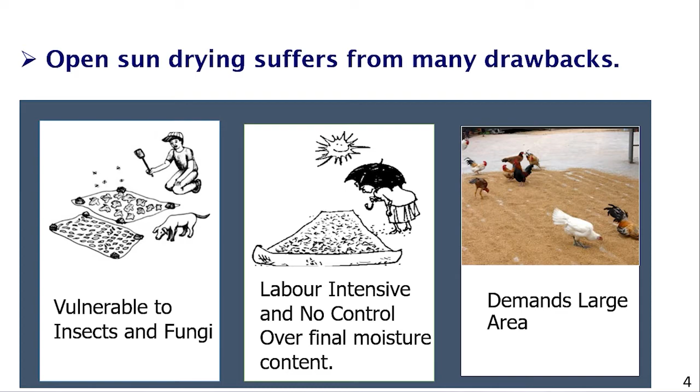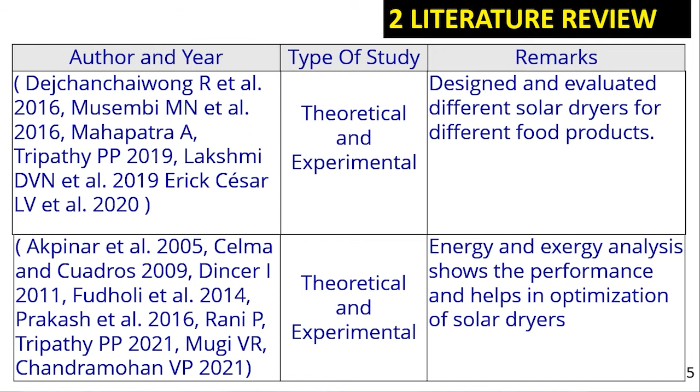There are many studies conducted in this solar drying area, and many authors designed and evaluated different solar dryers for drying different foods. There are also studies that show the economic benefit of using solar dryers. However, there are no studies conducted to evaluate the performance of solar dryers for drying injera specifically.

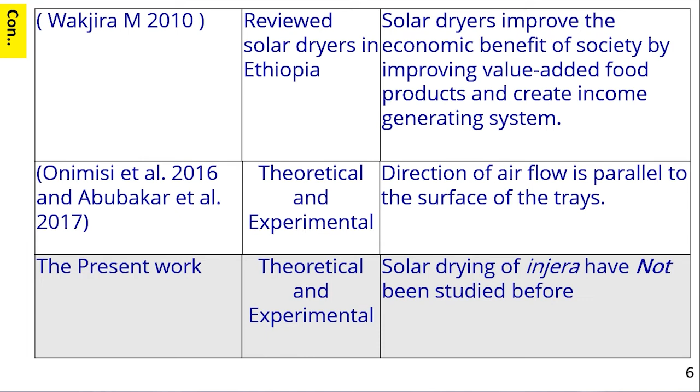Also, very limited studies were conducted to improve the non-homogeneity of drying air distribution in the drying chamber. So based on this research gap, the objective of this study will be presented next. The first objective is to experimentally investigate the performance of the modified mixed mode solar injera dryer. The next is to improve the non-homogeneity of drying air distribution through the drying trays. Finally, to perform economic analysis of this modified mixed mode dryer by comparing it with electric dryers.

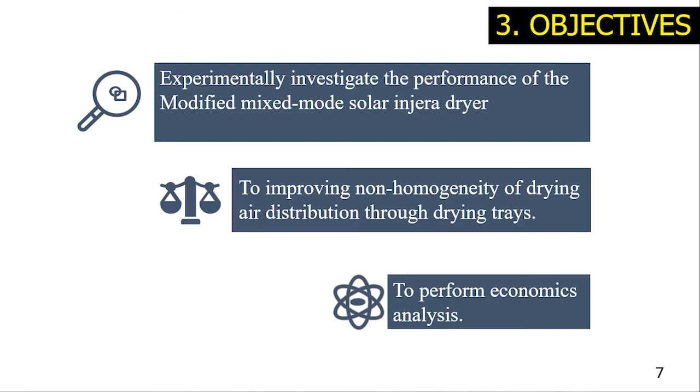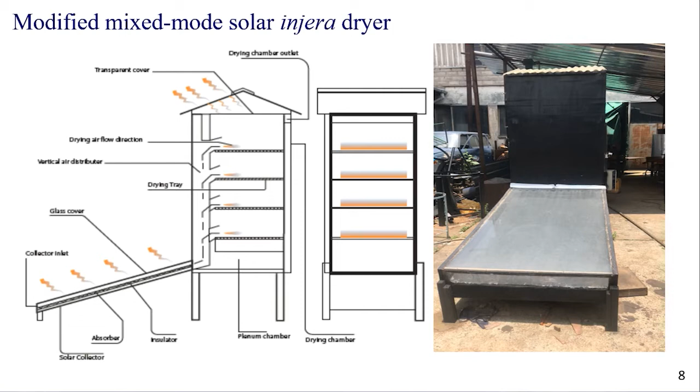This is the image of this modified mixed mode solar injera dryer. As you can see, the vertical distribution channel is integrated inside the drying chamber to facilitate uniform air distribution through different drying tray positions.

The methodology followed in this study is classified into two. First, different flow parameters were measured in 5-minute intervals. Simultaneously, the weight of injera was measured in 30-minute intervals, and based on this testing result, the performance of the modified mixed mode solar injera dryer is evaluated by using energy and exergy analysis, and then economic analysis was also conducted finally. In doing so, different assumptions were imposed.

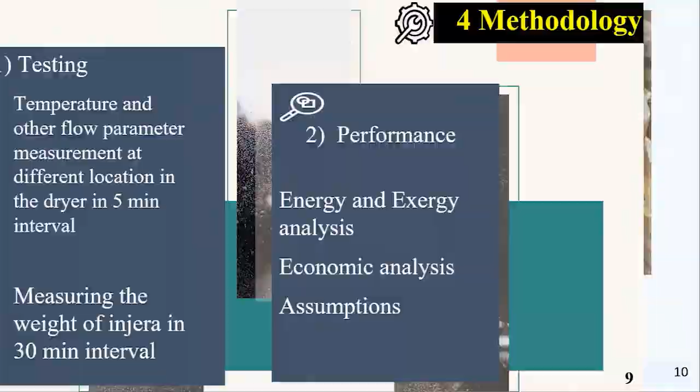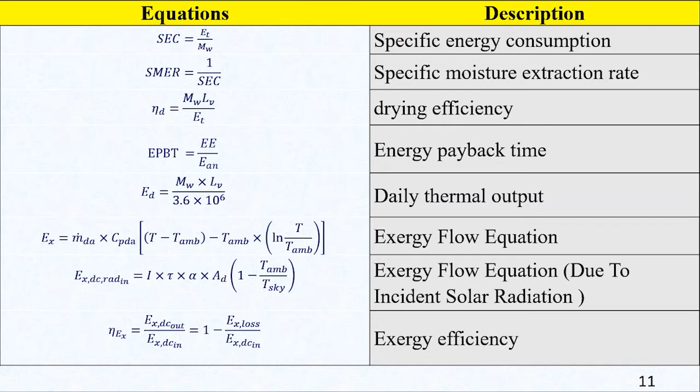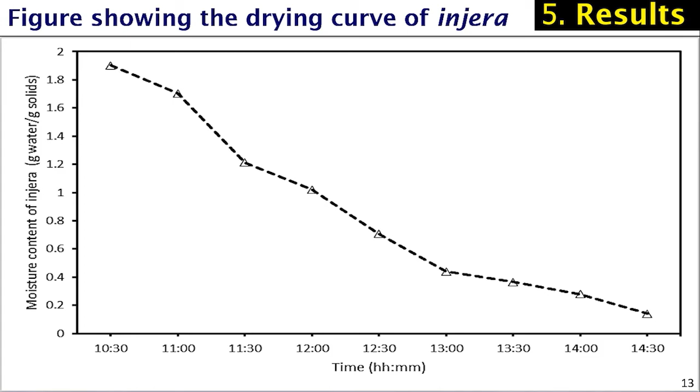And also, for the performance of the dryer, the specific energy consumption and the drying efficiency were evaluated to be 6.9 kilowatt-hours per kilogram and 10%, respectively. So this shows that specific energy consumption was somewhat higher, which shows that if the dryer were loaded to its full capacity, which is 10 kilograms of injera per batch, we can achieve a lower specific energy consumption, which also increases drying efficiency.

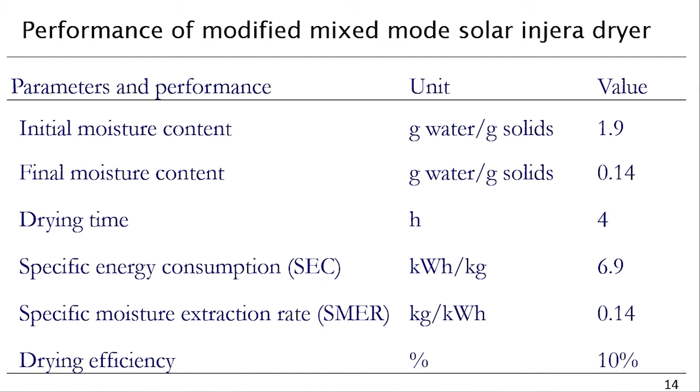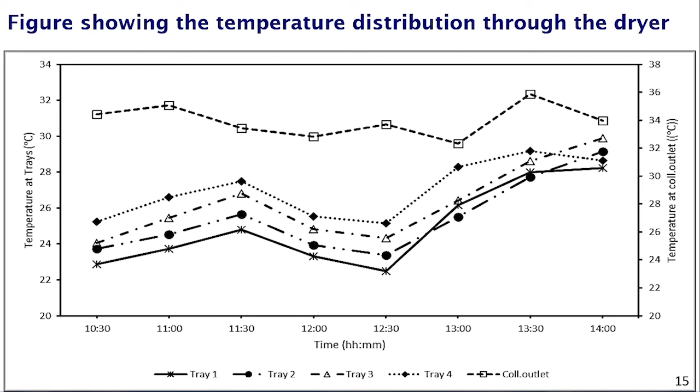Also you can see the temperature distribution through the drying trays. The bottom four lines show that, and the maximum difference between the modified mix drying trays was found to be 2 degrees Celsius, which indicates that almost uniform temperature distribution was achieved throughout the drying trays.

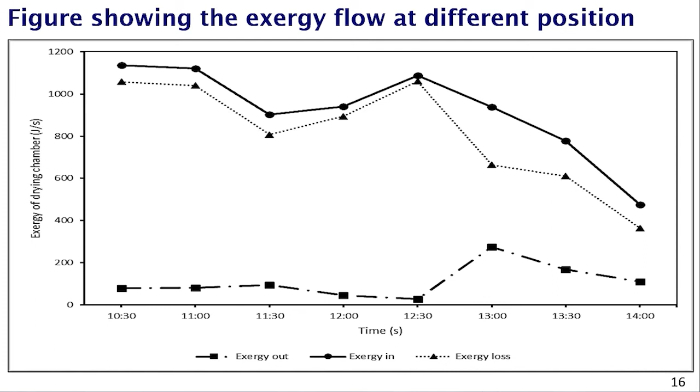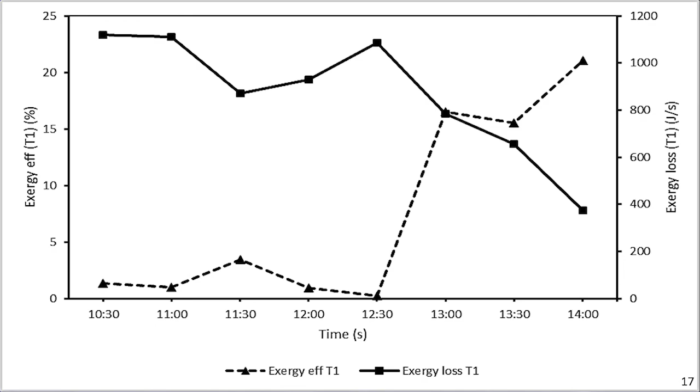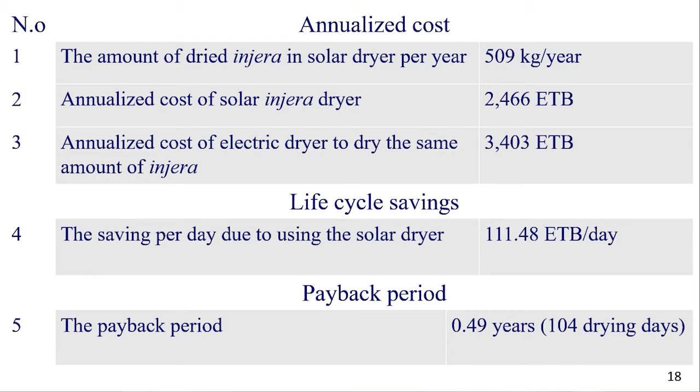Next, we can see the life cycle savings. Here, the saving per day due to using a solar dryer is 111 birr when compared to electric dryers. Also, the payback period of the dryer is found to be 0.5 years.

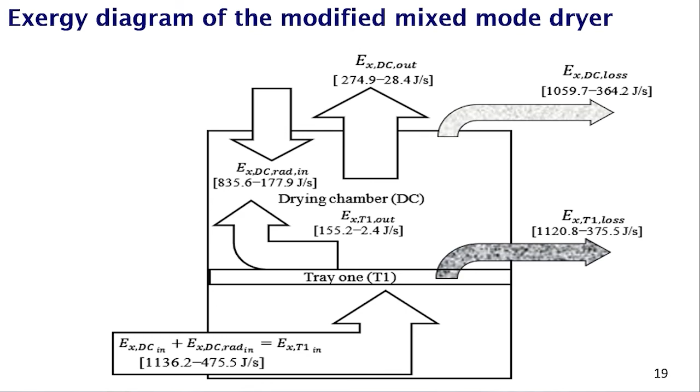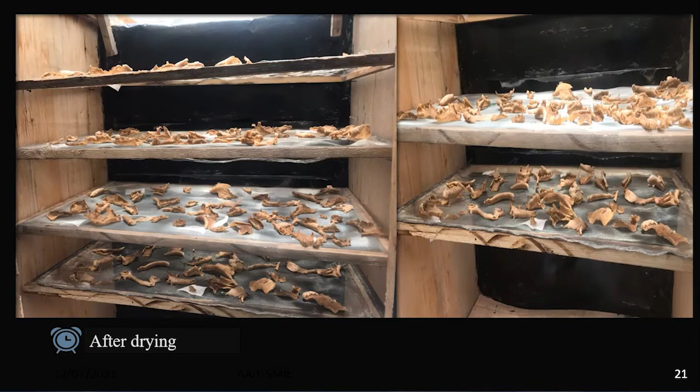Based on these results, we conclude that the modified mixed mode dryer performance was higher than open sun drying due to the higher drying air temperature. Also, the quality of dried injera in this modified mixed mode solar dryer is better than open sun drying.

Also, uniform temperature distribution was found throughout the drying trays, which is the result of the vertical air distribution channel integrated inside the dryer, which maintains uniform temperature distribution throughout the drying trays. And also from the economic analysis, it's found that the society will benefit if it is adapted.

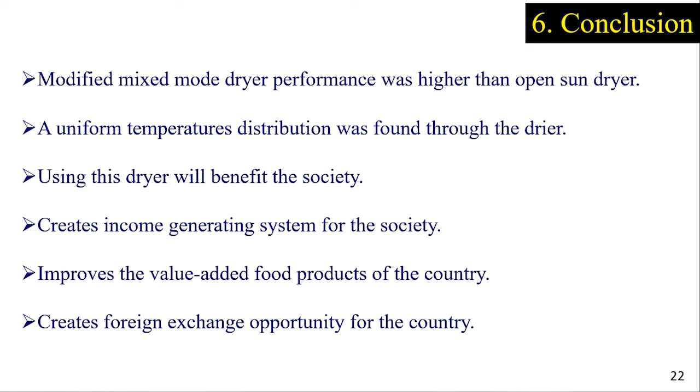This modified mixed mode solar dryer will create an income generation system for the society and for the government also, and it improves the value-added food products of the country, which is integrated into foreign exchange opportunities for the country, because if injera is dried in good quality, it can be exported throughout the world.

Finally, we present some recommendations for future work. The quality standard of dried injera should be researched, including the moisture sorption isotherm, and the performance of the dryer should be measured at full load.

Improving the solar dryer by adding backup heat storage, which can facilitate using this dryer at night time when there is no solar radiation, resulting in higher productivity.

Also, the society should be informed about solar injera drying through different research and media to increase their awareness. EAI ICAST 2021 will be the first to introduce this to society, and such events will have important contribution in informing the society and introducing this drying technique to the society and to the government also, to implement it.